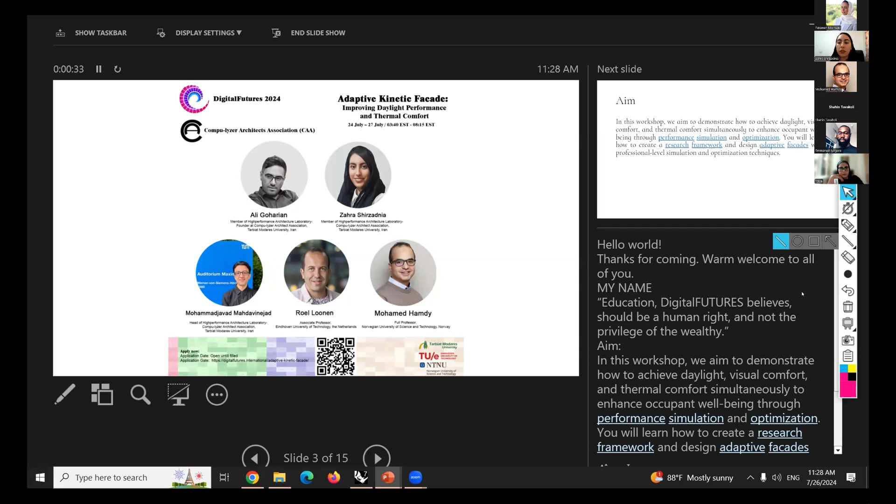University of Iran, and as you know, the manifesto of DigitalFutures is that education should be free and a human right, not the privilege of the wealthy.

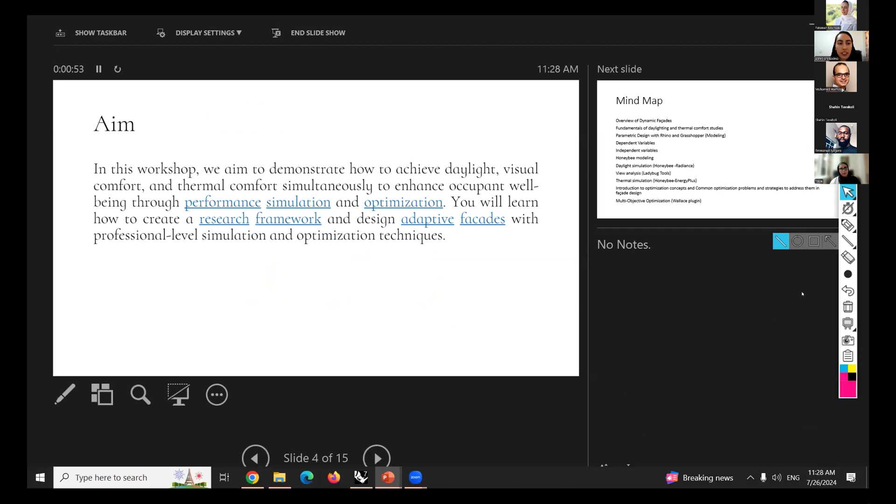In this workshop on occupant well-being through performance simulation and optimization, you will learn how to create a research framework and design adaptive facades with professional level simulation and optimization techniques. As you see in the picture, I mentioned...

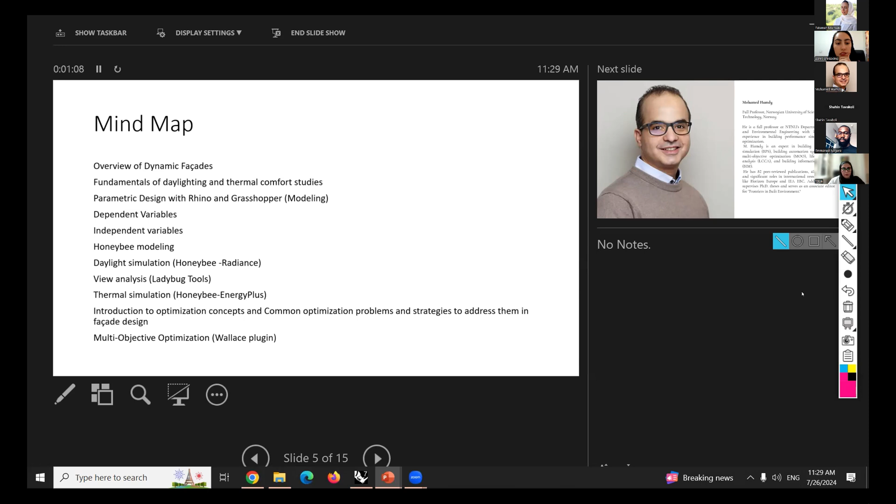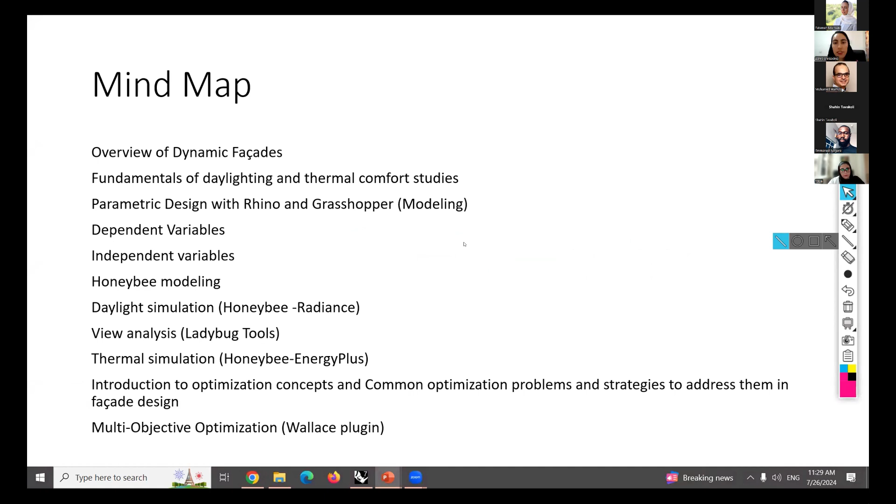We are so thrilled to have Professor Mohamed Hamdy, who is a full professor at NTNU Department of Civil and Environmental Engineering with many years of experience in building performance simulation and optimization. He is an expert in building simulation, building automation systems, multi-objective optimization, life cycle cost analysis, and building information modeling. He also has numerous peer-reviewed publications, supervises PhD theses, and serves as an associate editor for Frontiers in Built Environment.

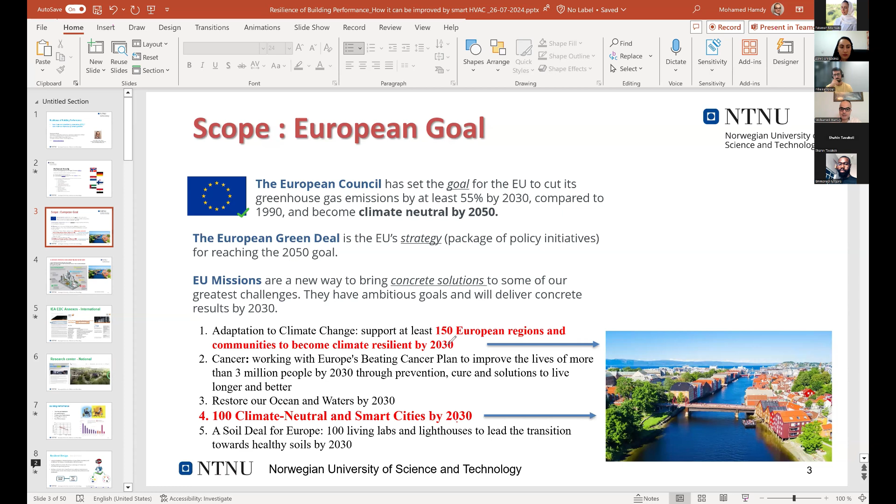But at the same time, we're also working on the adaptation to climate change, and here resilience is a topic. We have a target to have 150 European regions and communities become climate resilient by 2030 as well, and that's why it's very important to have agreement on what resilience is. Generally speaking in Europe, we're talking about climate resilience, flexibility, and also circular building, about reusability and reuse of materials. This figure shows the different main points we are working on here.

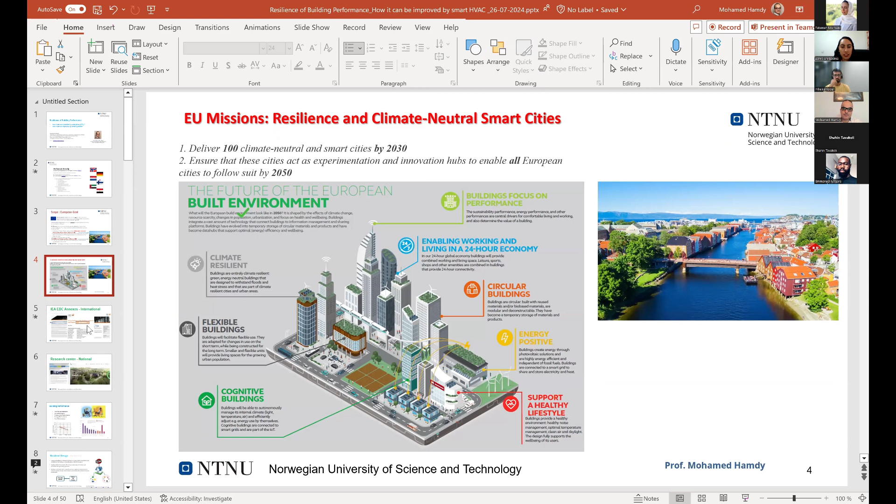Okay, good. So here is about these annexes, which is IEA, International Energy Agency, EBC Annex. There are two different annexes we are working on: Annex 82 about energy flexibility, and Annex 80 about energy resilience. And for now we have a new annex, established recently, about energy resilience of buildings in remote areas. This will become a new annex called Annex 93.

This one is established recently by these universities, you can see it in the slide. Meanwhile, also at NTNU, we have two big projects talking about neutral climate and zero emission buildings. It's called Zero Emission Neighborhood, an 8-year national project with more than 52 partners from industry and research. And before this project we had a project called ZEB, Zero Emission Building, and now we have Zero Emission Neighborhood, so we work on a larger scale.

Let's go to the topic of resilience of building performance. So if we talk about performance, we have thermal performance, indoor environment quality, productivity performance, and we have energy performance and cost performance.

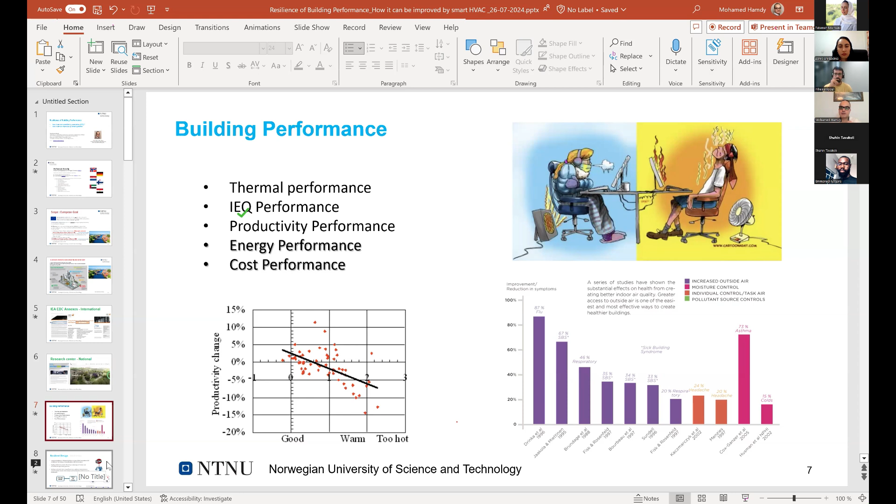And it's also connected to diseases, which became very obvious during the COVID-19 pandemic. It's very important to care about ventilation of buildings and also thermal comfort, because temperature has a direct relation with viruses and bacteria indoors and how fast they can grow. So if we talk today about resilience, we will focus on energy performance, and we're also talking about thermal comfort. These are the main topics.

So resilience design is a new way of thinking, because we go from fail-safe design to safe-to-fail design. Usually we create our buildings not to fail—this is how traditionally a designer thinks about the problem. But actually, the truth is that we should be able to accept failure. To be resilient means we are able to not drop very much, and also we can recover fast. This will come in detail in the coming slides when we talk about the definition of resilience. But as a concept, resilience means, okay, to fail, but you can come back.

Resilience can be defined for a person, for industry, or for buildings—depending on what we are talking about, we define resilience differently. If we describe someone as a resilient person, it means even when there are a lot of hard times in life, you can recover. First you can resist somehow, and then you can recover. But you also need to learn from that and become smarter, to learn from stresses and adapt to new stresses and deal with them more smartly. It's the same for buildings—we will talk about this cycle of resilience.

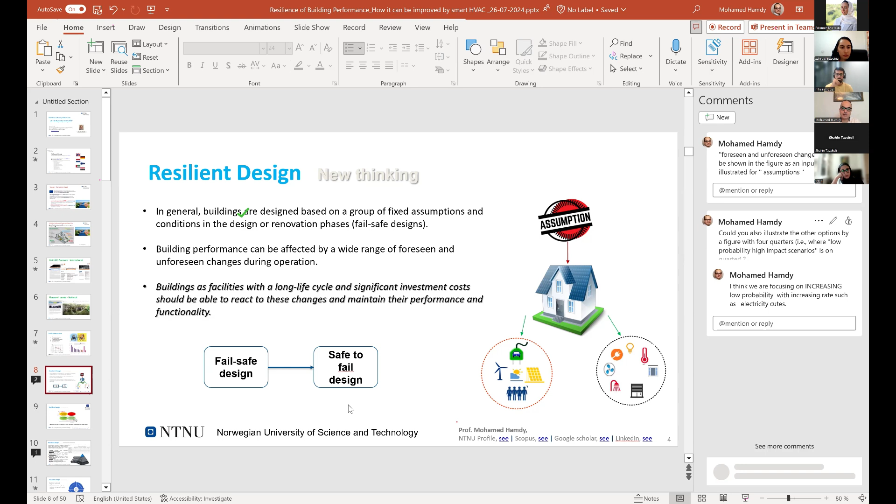When we talk about resilience, we talk about events which have low probability—they don't happen often—but if they happen, they have high impact. If you are able to deal with this situation, you are resilient. So resilience concerns low probability and high impact events. Traditionally in design, we work on high probability things because they're most likely to happen. But resilience means low probability, high impact, which is important to prepare for because of climate change and big disruption events.

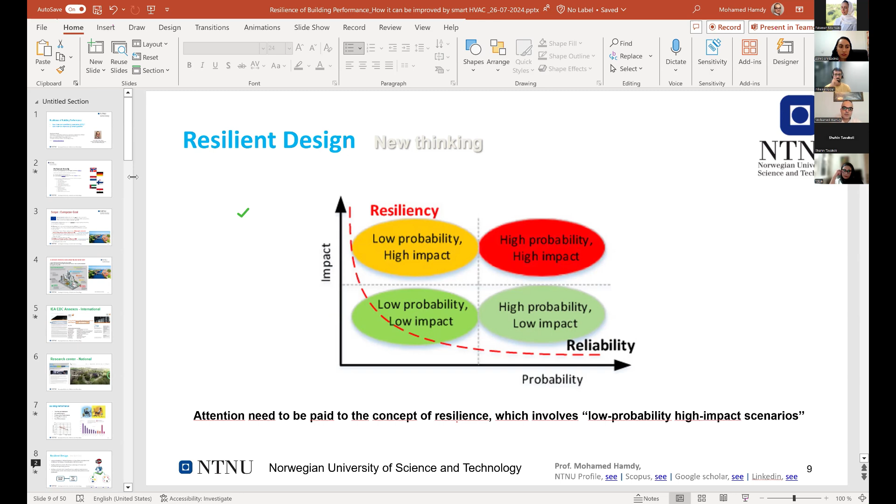In order to go more deep into the concept of resilience, we would like to say resilience has different attributes: efficiency, robustness, resourcefulness, redundancy, flexibility and adaptation. If we ask ourselves what's efficiency, what's robustness, what's flexibility, many people are a bit confused. We need to know the definition of each, because sometimes there is trade-off between these attributes. But in order to be resilient, you have to behave well in all these regards: to be efficient, robust, and resourceful, and so on.

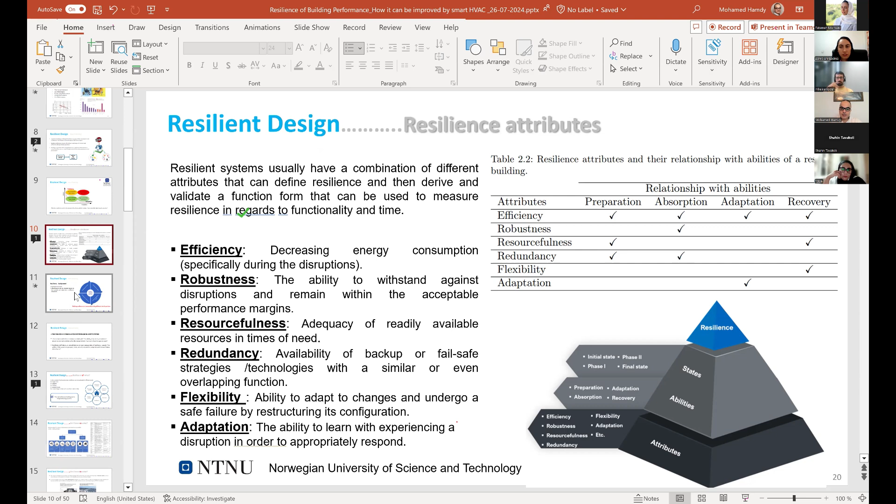In order to be very specific and have a common definition for all of us, we need things to be very well defined and simple. So we came up with this: first of all, when we talk about resilience, we have to ask ourselves four main questions.

The first question is: resilience of what? What are we talking about, what are the boundaries of what we are talking about? Here we talk about the building. But it's not enough to say just the building, because we need to say what is the boundary of the building and what is included inside it. Do we mean only the building, the rooms? Or the building and the energy system inside it? Or the building and its connection with the electric grid, different power supply and renewables? We have to put a boundary about what we are talking about. So it's important to pay attention to that, because based on your answer, the work will be defined.

Then, resilience to what? We're talking about the building - here we have to be resilient in terms of, for example, daylight, lighting in general, visual comfort, or thermal comfort. So here we talk about... sorry, this is not 'to what' but 'based on what'.

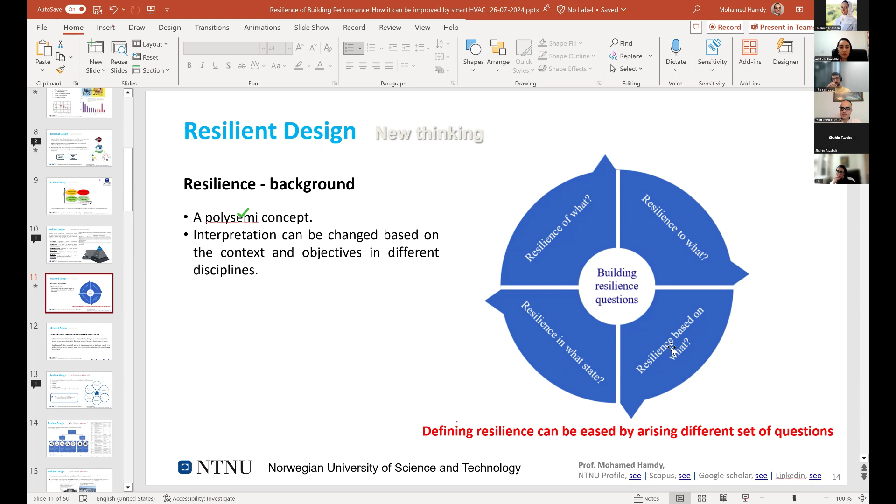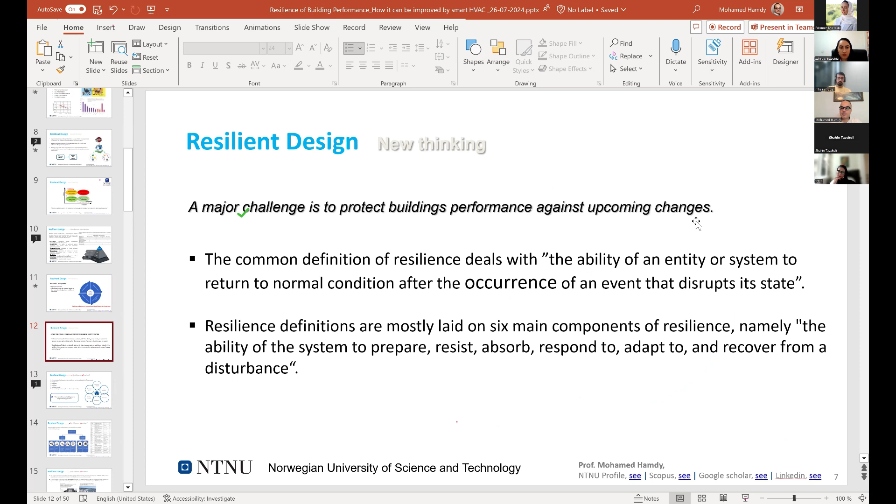So the major challenge is to protect building performance against upcoming changes. Let's go directly to resilience of what. We can talk about a single zone, system, or building, or neighborhood, or larger scale, as mentioned. So building can include different things here.

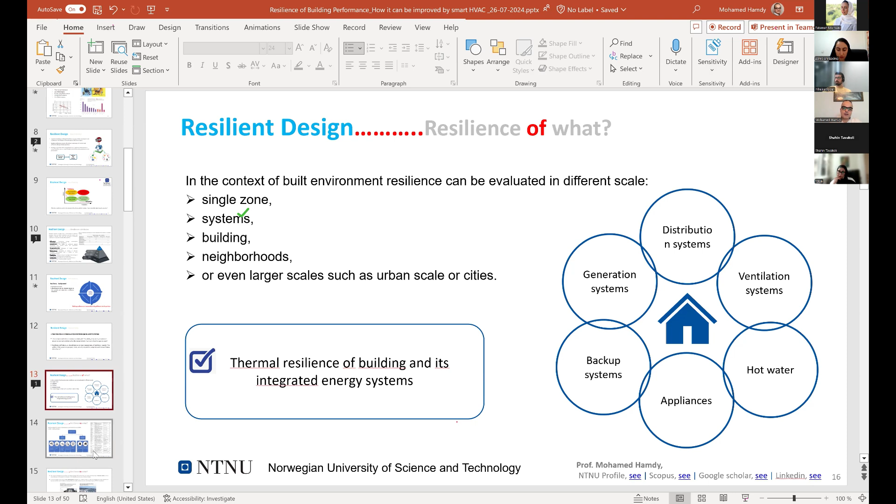Resilience to what - this is very, very important. We're talking about different events, called disruption events - something that attacks the building. In order to classify this, we can classify disruptions as natural disruptions or technological disruptions.

Natural disruption can be meteorological, related to weather, or hydrological, related to floods and water in general, and geophysical, and also biological, like diseases and pandemics. Technical disruption can be related to general failure, like power failure, or failure in the HVAC system or other systems that provide comfort.

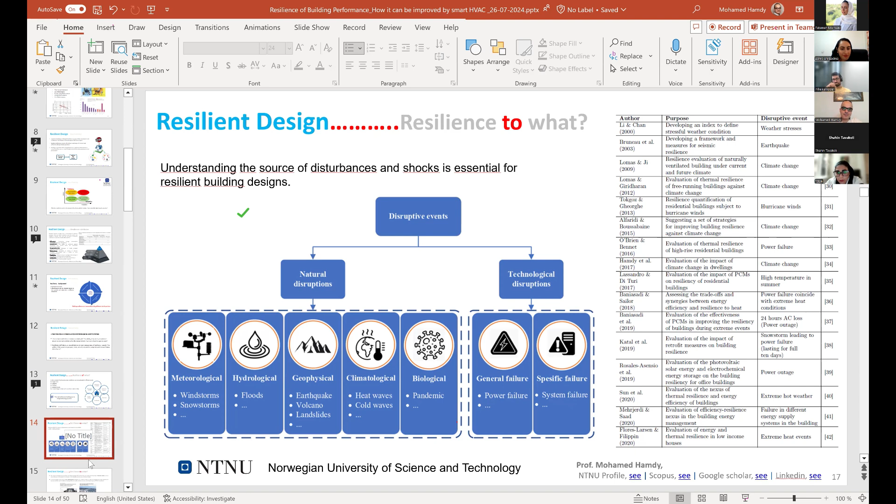So this is a general classification. It came from the literature, and there was a PhD thesis by Shabnam - she is Iranian, and I was very proud of her work with me, actually. I will come to her thesis in one of the coming slides.

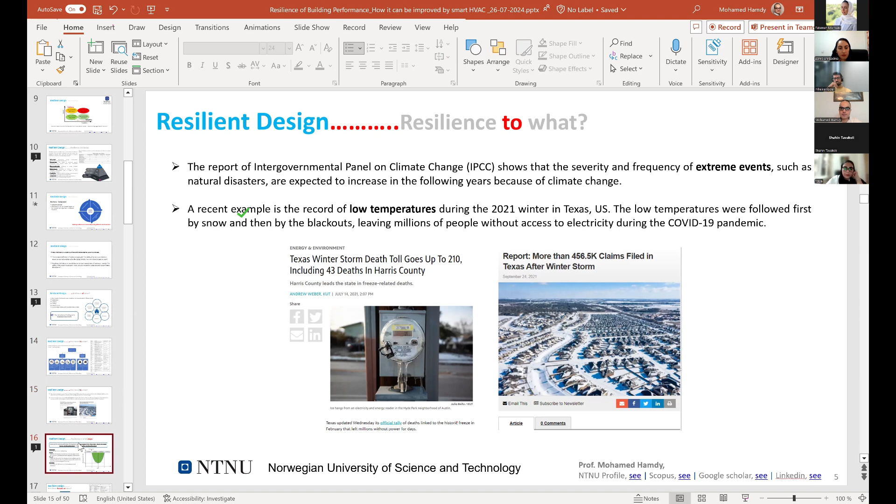Building will start to recover when disruption disappears. So we call this the recovery phase. And then the final state, we should come back to the initial state, but the system is able to learn here and get some messages after full recovery of the building.

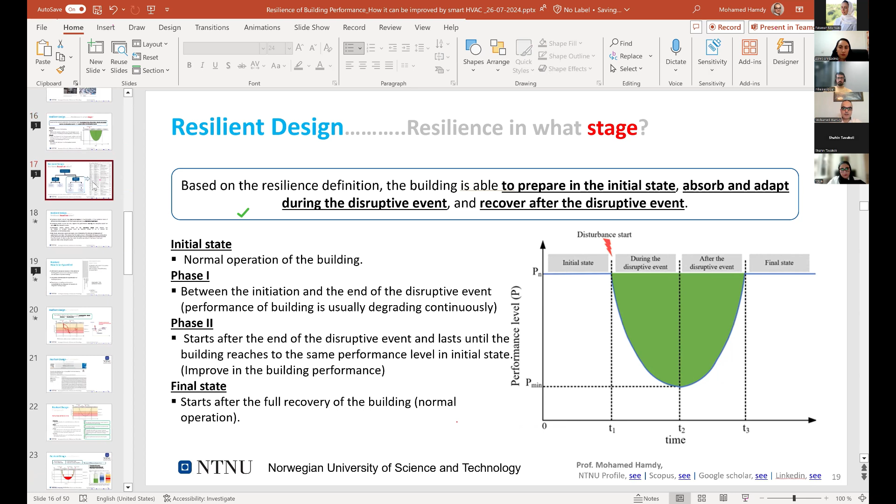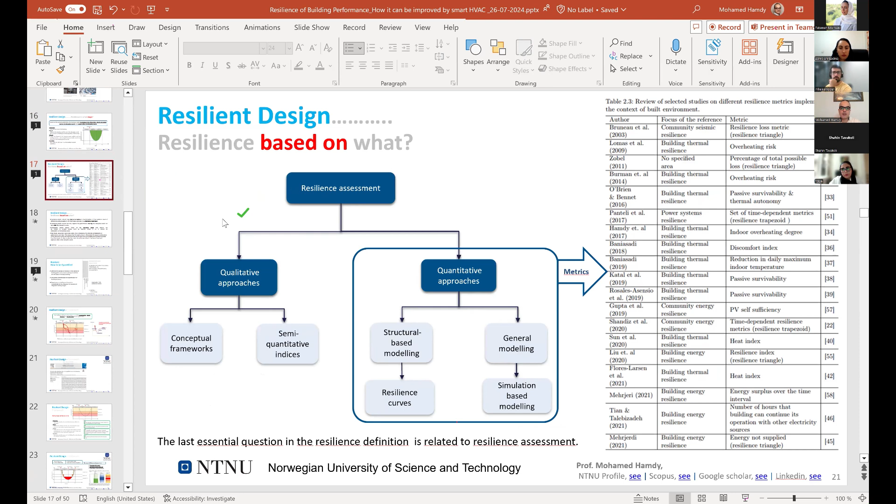If we go further, we can see resilience assessment. We have investigated different approaches to quantify resilience, and they ask resilience of what? So we should go to metrics or key performance indicators. There are different key performance indicators we found, but there is a shortage in most of them because they don't cover the 4 stages. That's why we went and developed our key performance indicator based on temperature.

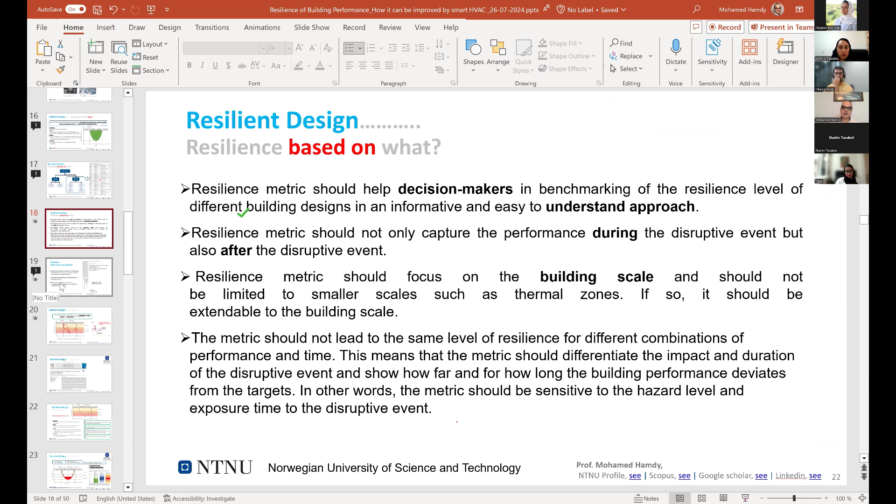In order to make this development, we wanted to have some criteria. Let's say this resilience metric should help the decision maker and enable benchmarking. Also, the resilience metric shouldn't only capture the performance during the disruption event, but also after it. So we started to put some points together to think how we're going to define a good metric for resilience. This was mainly the research questions and goal for a PhD by Shabnam, which I mentioned, and that was the PhD thesis toward resilience building performance definition, framework, and metric.

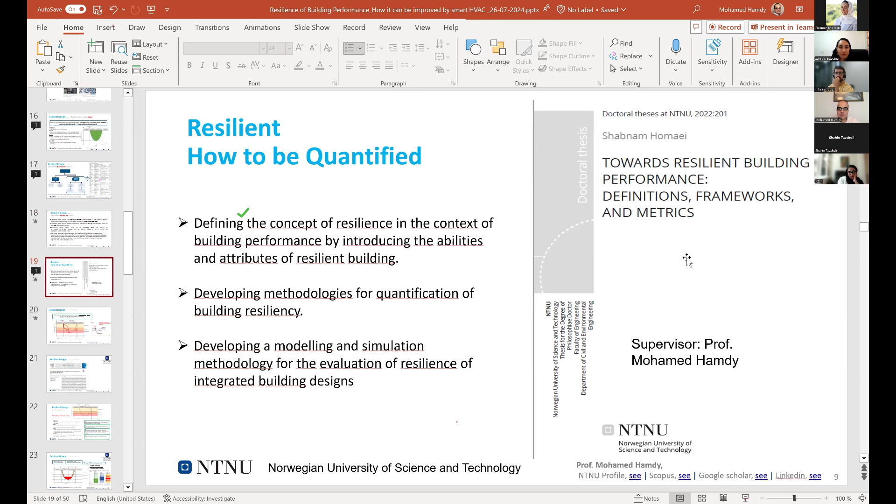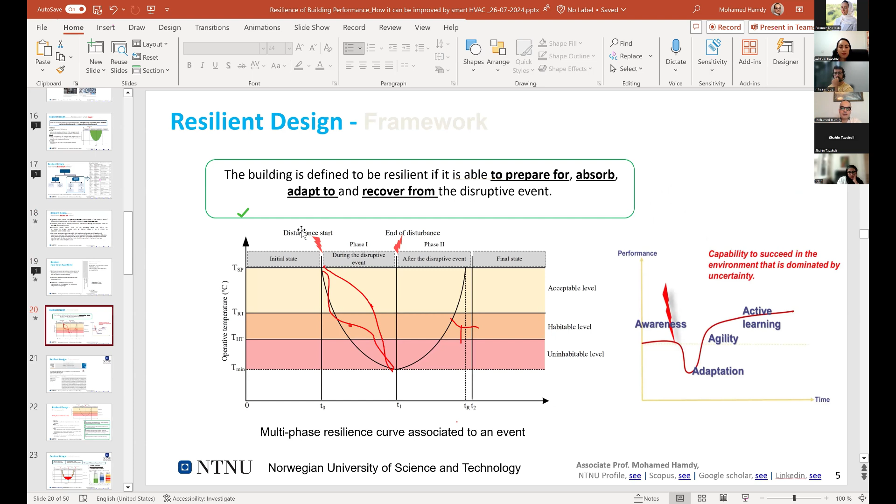What is coming as output here is we started to define building resilience to prepare for the event, and also to absorb in the second phase, adapt, and recover. If we are able to do all that, we will be resilient, but we want to quantify that. This is the main paper of the PhD thesis, titled 'Thermal resilient buildings: How to be quantified? a Novel Benchmarking framework and labelling metric.' So we also developed a metric to quantify resilience.

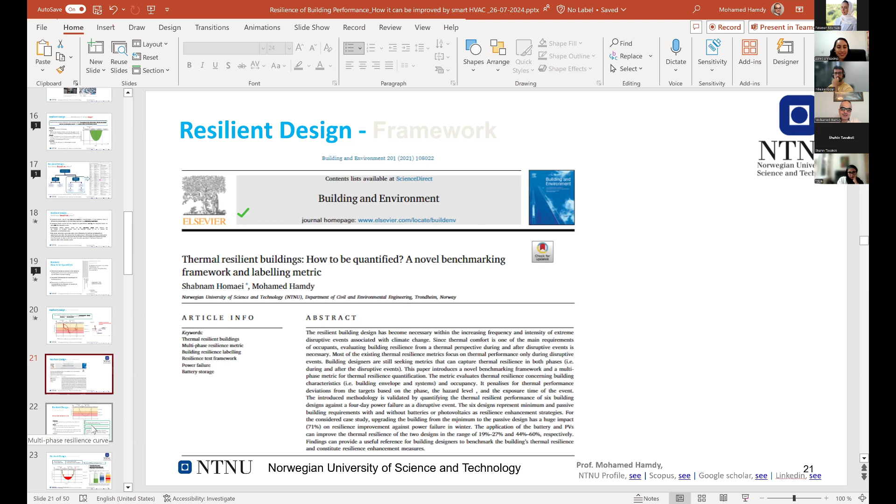So here again is the definition of these stages: initial phase, phase 1, phase 2, final state. We figured out we have to define different levels of comfort during the event, because we cannot just say there is degradation and that's it. We have to define this degradation in performance—is it an acceptable level, a habitable level, or an unhabitable level?

In order to quantify resilience, if degradation happens fast, it means this area will be large. And if you stay longer, more degradation happens, meaning you are in a worse situation—here is the unhabitable level. So if you spend longer time here, it's too bad. Here is also bad. Here is less bad, let's say.

So we have to care about how severe the degradation is, how fast it happened, and how long you stay in each state. That's why these stages can differ from application to application. If we talk about a building with people inside, this will be the thermal comfort criteria, different levels of thermal comfort. If we talk about a refrigerator, like in a supermarket, it will be different because we have to care about the food inside and so on.

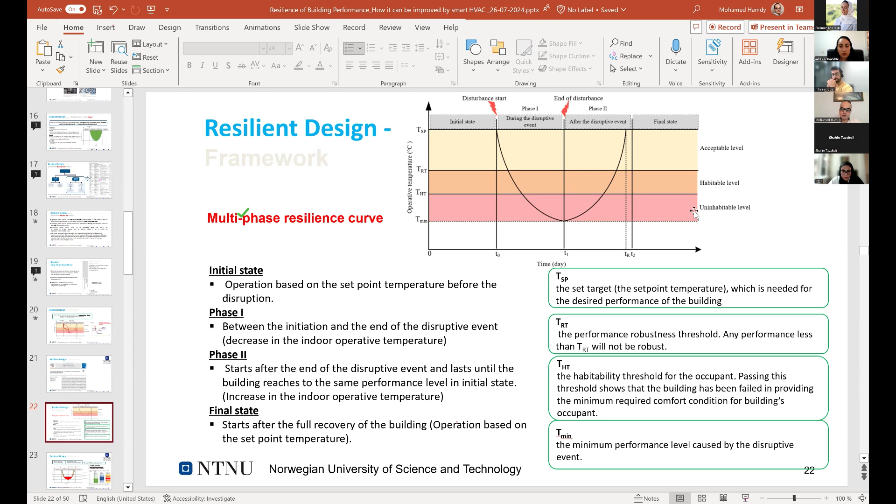So it depends. We focus on residential buildings, and consider the phase of the event, the hazard of the event, and the exposure time of the event. This figure is clearer and to the point, summarizing what we were talking about. So here we applied it for temperature. The key performance indicator becomes temperature: T set point, T habitable and unhabitable level, and this minimum happens based on the disruption event.

So here, initial state, disruption happened. When disruption happened, degradation happened. There are segments S1 and S2. S1 means the first period of time you stay in this acceptable level. S2 is the second phase of time, exposure time is longer, so you stayed more, meaning there's more penalty for being in this level.

So on, in a habitable level and unhabitable level—if you are in segment S6, it will be a very bad situation. So we give a penalty for how much you stay in each segment, and also whether you are in the degradation phase or the recovery phase. Because when you are in the recovery phase, your body and the people inside the place realize the situation is recovering, so they have more hope that everything will be okay.

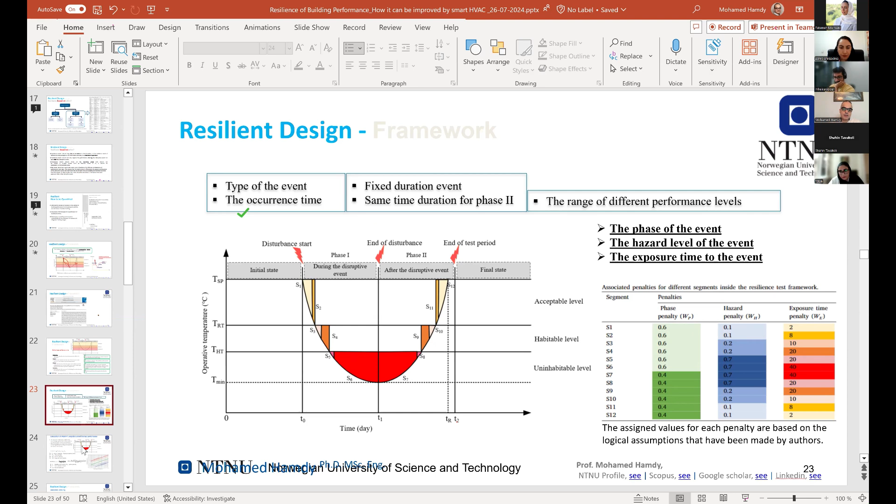So in order to define the temperature limits, it's also challenging because when we have a building, it's a multi-zone building, not a single zone.

Another thing about thermal comfort: if we're talking about buildings with operable windows, meaning windows can be opened, or a lot of adaptation, comfort is not fixed. So we cannot say the temperature to feel comfortable is 21. No, it depends on the running mean outdoor temperature.

That's why the set point here is a curve, or a line, so this comfort can be different from time to time. The set point is not expected to be fixed; it depends on what threshold you have in your adaptive thermal comfort level. So in this figure it shows fixed, but in reality, in the equation, it is not fixed.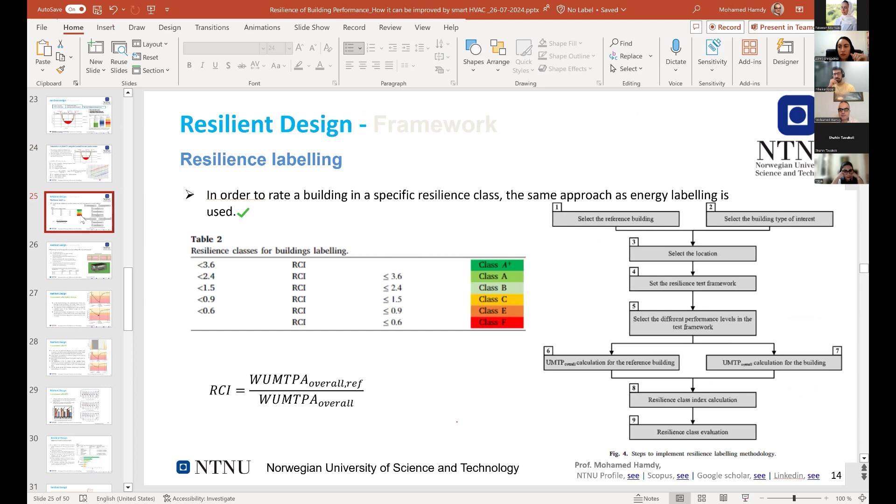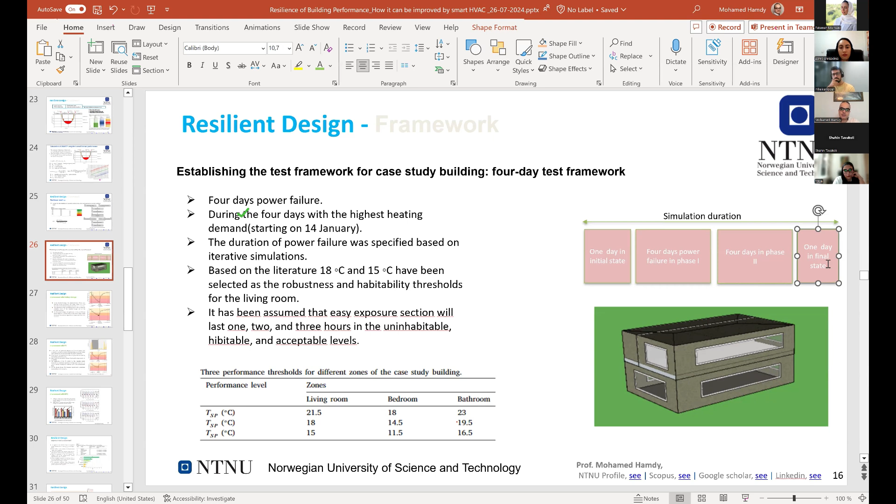Okay, so we published this work—here is the framework I talked about. It's 1 day in initial state, then 4 days power failure or whatever event happened, then 4 days in phase 2, and then 1 day back to initial state. This is the fixed framework to make benchmarking.

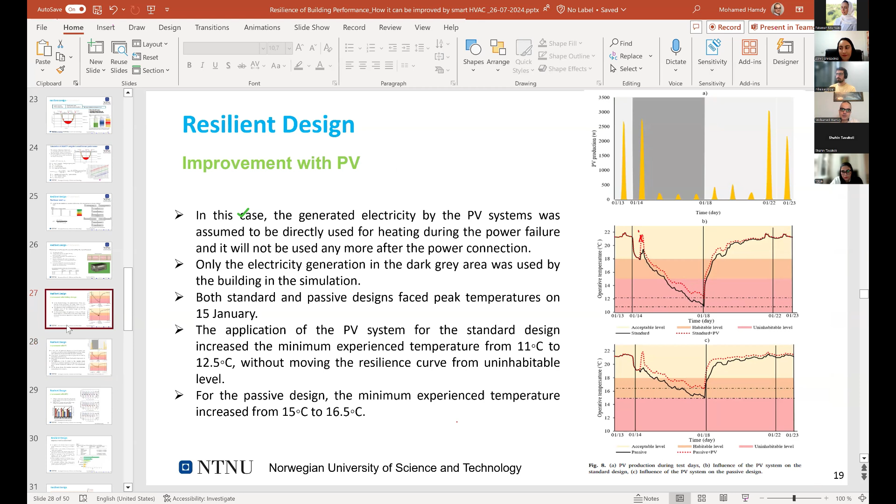So I see the time is running now. I will mention here, this is about improving with PV. The previous one was improving by battery, improving by PV for both passive house and not passive house. Here, when we talk about model predictive control, how this can improve the performance.

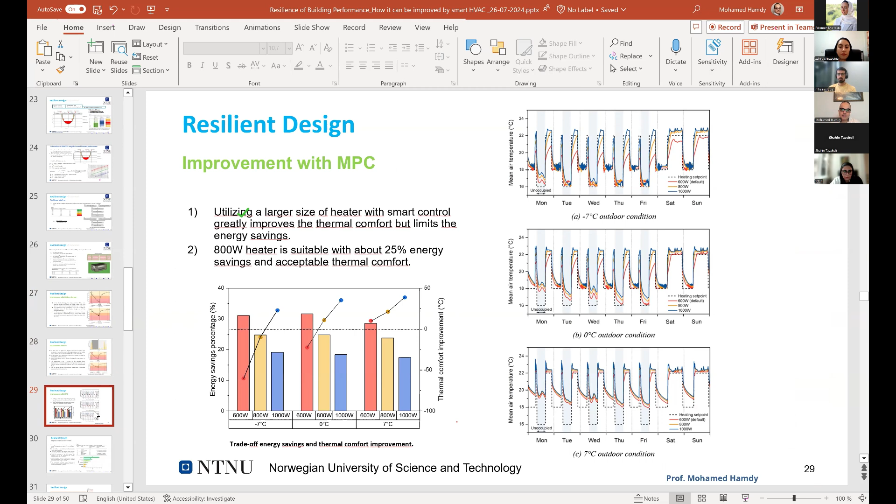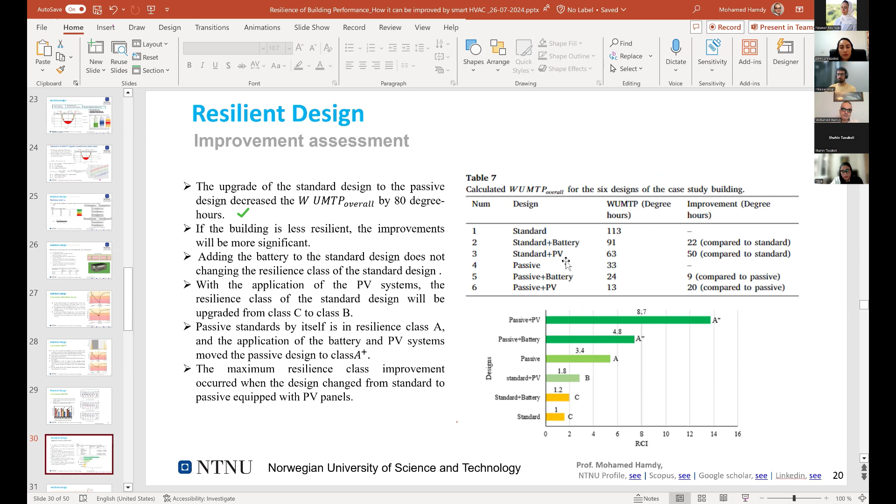The same work I showed to you was for power cut, and degradation is a drop in temperature set point or temperature in rooms. Here, we also collaborated with the USA, University of New York College, and we did the same approach but for overheating.

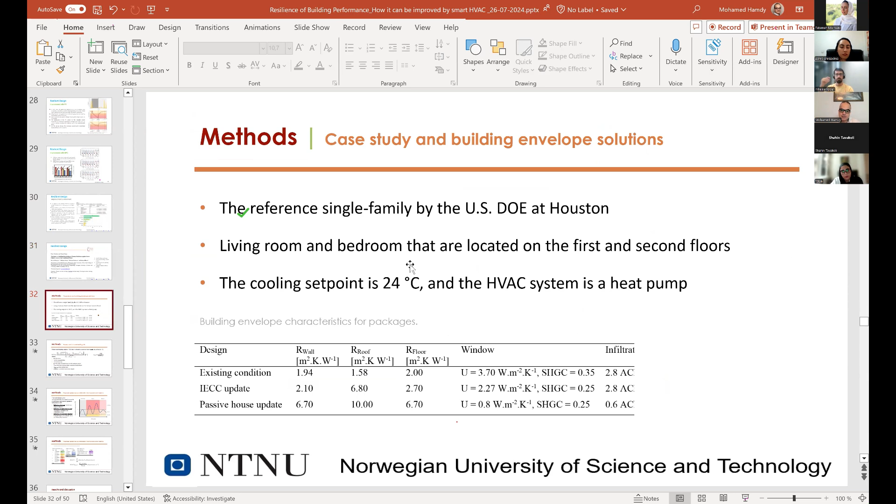The paper title is 'Impact of Building Retrofitting on Thermal Resilience against Power Cut: A Case Study with Air-Conditioned House.' So now we talk about hot climate - previously we were talking about cold climate. The study examines the same indicator for hot climate using the same approach.

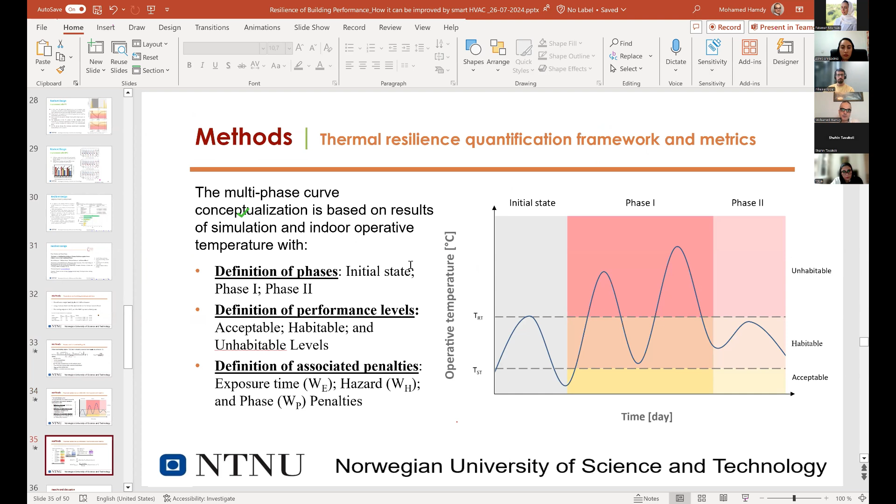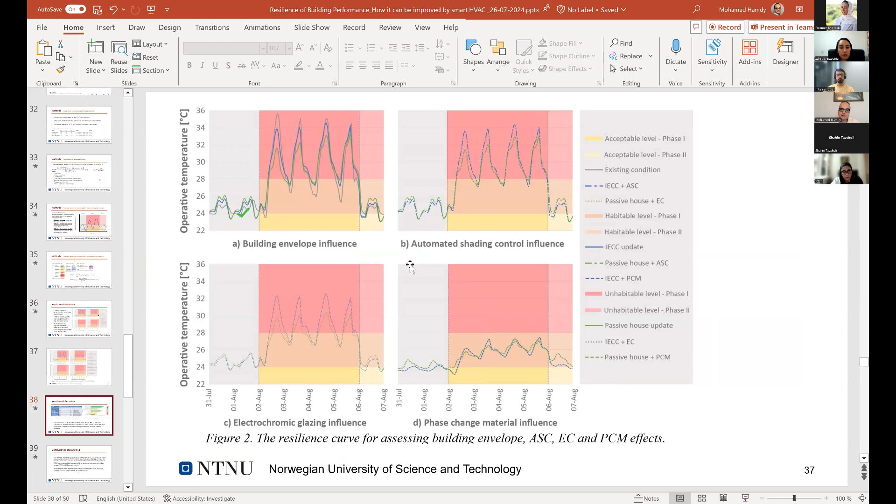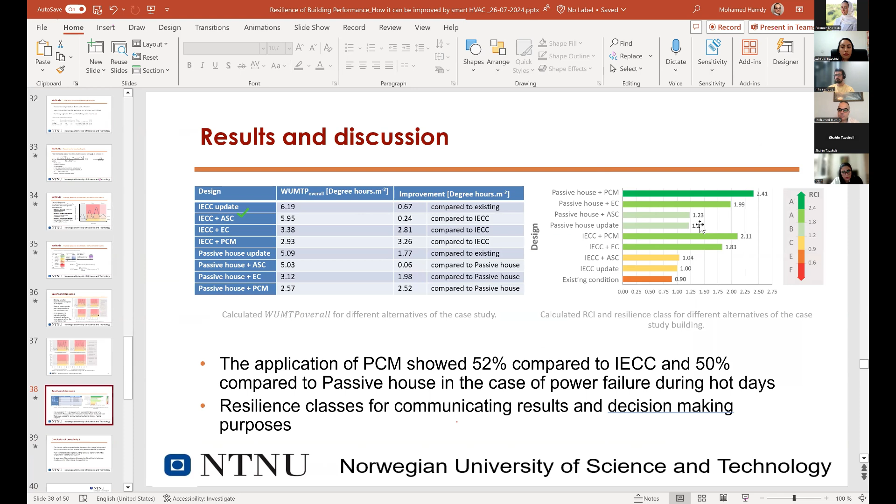So here we see temperature go up, instead of go down like the previous one. And here also we made a weighting for each phase of degradation. This is the main results, and this is also the benchmarking for building retrofitting solutions - different solutions to quantify how the label of resilience will be for each case.

That was the conclusion for now, I think, because it's like a half an hour presentation. So I would like to thank you, and I'm very happy to receive your questions and make discussion as you wish.

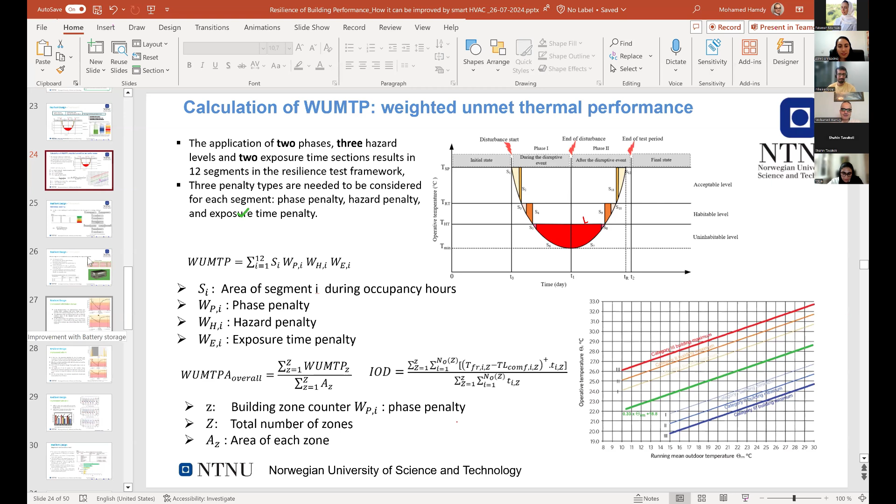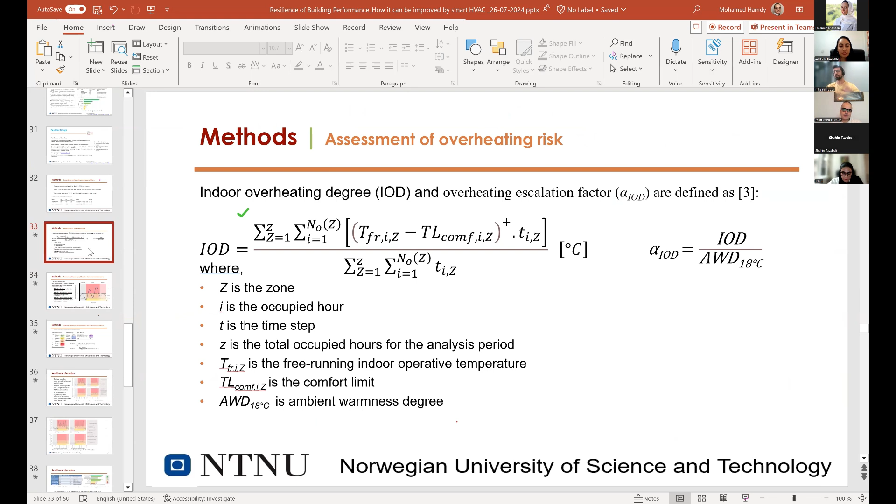I showed you also maybe this other work with California College. Yes, I read that. And you're creating the reverse way, because in the previous one you dropped the air temperature, but now it's about overheating degree. I assume Cheyenne is Iranian as well. Yeah, I think all Iranians work in this area. Also Kavan Javanroodi and Vahid Nik at Lund University are creating some framework for future weather data.

Okay good, thank you. And my regards to Fabio, because I haven't seen him for a year. So now he's in Toronto, presenting our first report about the thermal framework analysis, thermal resilience in buildings. Sounds very interesting, thank you so much.

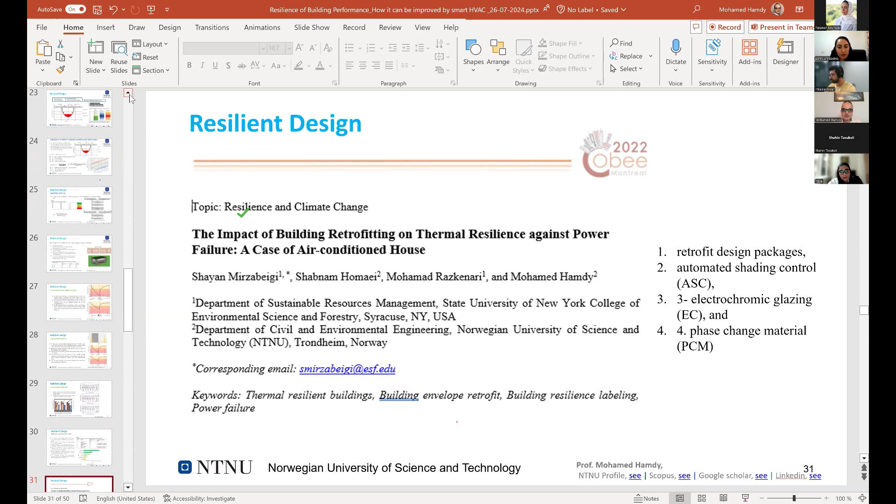It's about improving resilience. In this study we examined only two or three solutions. Here we talk about resilience in cold climate countries and power grid, because as I mentioned, resilience can be defined in different ways, so depending on which resilience we're talking about, the solution will differ.

Here, because we're talking about temperature degradation or temperature drop in buildings, we had a standard house as reference and a passive house, because with more insulation, degradation is expected to be less. Passive house means more insulation and less ventilation. This can improve resilience definitely - it was expected, but here we wanted to quantify it.

So this solution is about building envelope. Here we didn't talk about adaptive building envelope, I know this workshop was talking about that. It's very important to also examine different solutions about adaptive facade and how it can help.

Here we talk about fixed, not adaptive, passive solutions, plus battery and photovoltaic with PV. All of them can extend how long you have power during failure, or extra power from solar, but not all can be utilized immediately. You cannot simply calculate that generating this power will let you survive that long, because not all power generation can be utilized at the same time, especially without buffering or a battery. We examine these solutions here, but there's more depending on which key performance indicator is used.